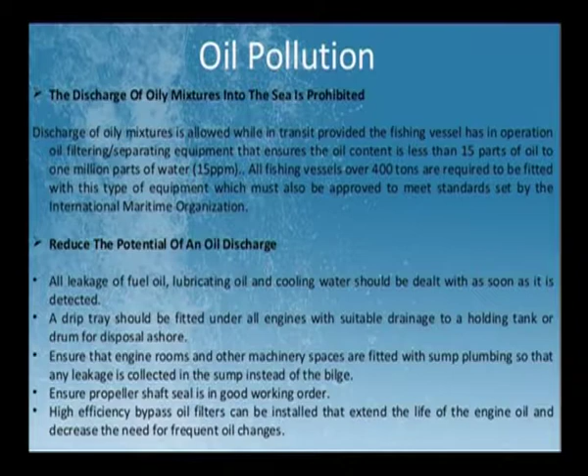We need to also reduce the potential of any kind of oil discharge. So, any leakage of fuel oil, lubricating oil, cooling water should be dealt with as soon as it is detected. And in case any kind of leakage is there, there should be some kind of an alarm system that sounds, so we are aware of any such leakage that is occurring. A drip tray should be fitted under all engines with a suitable drainage mechanism to a holding tank or a drum which can be disposed of later when the ship is ashore.

Ensure the engine rooms and other machinery spaces are fitted with sump plumbing so that any leakage is collected in the sump instead of entering the water body. Ensure the propeller shaft seal is in good working order. High efficiency bypass oil filters can be installed that extend the life of the engine oil as well as decrease the frequent oil changes.

Moving on to garbage pollution, obviously when ships are in commute through many months, especially fishing trawlers, there is going to be certain kind of garbage that is getting disposed, but it cannot be disposed mid-sea wherever they want. There has to be a suitable procedure; it has to be collected in a hold and then released. So, the main items which usually cause problems and are completely prohibited are trawl and fishing nets. They tend to suffocate the aquatic animals, and catch onto the fins of these huge fish or sometimes even small fish, literally killing them.

Synthetic rope, plastic sheeting, 6-pack holders which are basically made of aluminum or plastic to hold drinks, fiberglass, strapping bands, plastic ice bags, bait gaskets, paints, electrical or electronic equipment, disposable eating utensils. That is another huge hazard, especially styrofoam, plastic, all of that is very dangerous to aquatic life. And floats which are used in rescue missions.

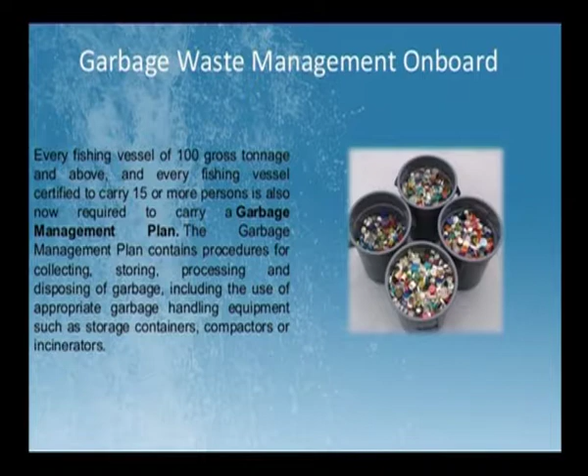So, all of this is encompassed in the garbage plan, and without having a suitable plan and action, they cannot set sail. This includes appropriate garbage, organic garbage, as well as handling certain equipment such as storage containers, compactors or incinerators.

Moving on to industries, we need to improve sewage disposal facilities and disposal systems, marine monitoring and regulations. We need to treat waste, the oils and other chemical discharge before discharging into the sea, effective solid waste disposal and treatment. We need to refrain from construction of illegal seaside ports or harbors.

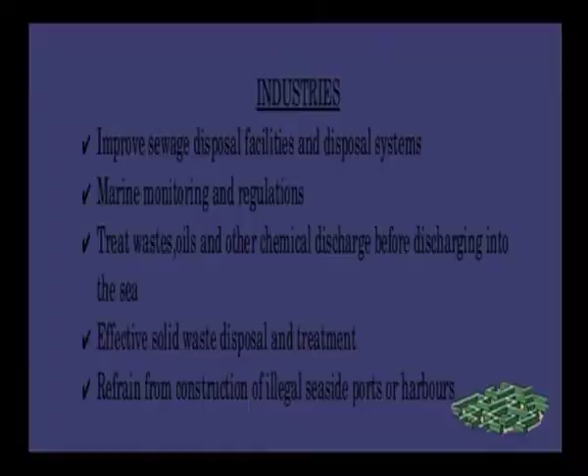What can the government do in this kind of context? The first thing is obviously creating awareness, and we need to provide education to the general public as well as the industries and the workers in these industries. Port management authorities can examine ships and portside factories for any kind of harmful effluents or emissions.

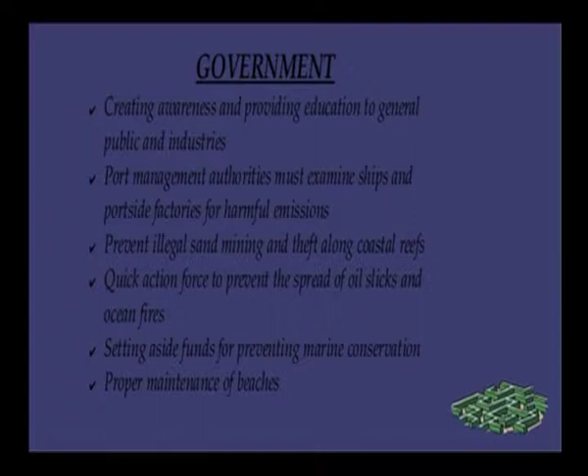We need to prevent illegal sand mining and theft along the coastal reefs. What happens when the sand keeps getting smuggled is the shore gets eroded, and it affects the marine environment, marine life as well as the stability of the coast. A quick action force to prevent the spread of oil slicks and ocean fires, setting aside funds for marine conservation, proper maintenance of all beaches.

Now, simultaneously, when the government is doing the legislative portion of it, what is the role of the scientific community? They need to go about the cultivation of marine bacterial plants that enhance degradation of organic pollutants, protection and enhancement of coral reefs, neutralization of acidic or basic emissions to maintain the pH of the water, because if the pH of the water goes off balance, it is going to affect marine life encompassing plants as well as animals.

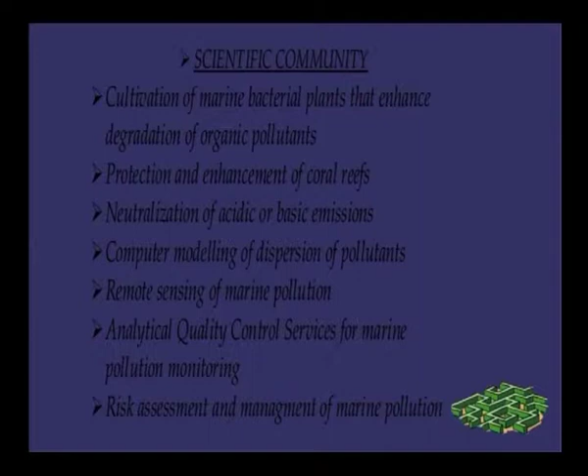Computer modeling of dispersion of pollutants, remote sensing of marine pollution, analytical quality control services for marine pollution monitoring. We need to have a risk assessment and management of marine pollution. So, we need to be aware of the possible ways the water body is getting polluted, how it can be curbed, and the second we realize that it is getting polluted, we should nip it in the bud rather than let it bloom and grow.

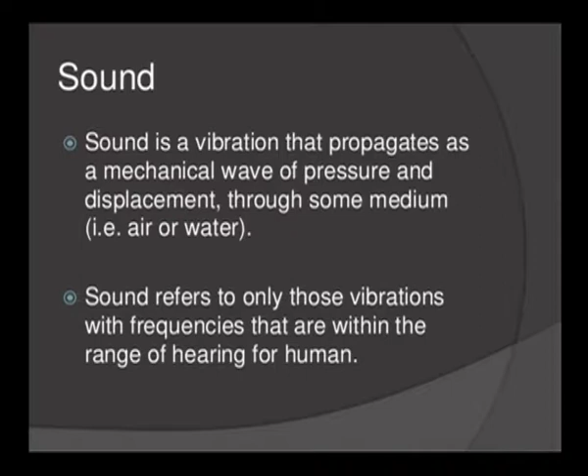Now, moving on to noise pollution, cause and effect. Noise pollution is a derivative of basic sound. Sound is nothing but a vibration that propagates as a mechanical wave of pressure and displacement through some sort of medium, usually air or water. Sound refers to only those vibrations with frequencies that are within the range of hearing for humans.

Now, the difference between sound and noise. Noise is basically any kind of unwanted sound. It is measured in decibel units. So, anything pleasing and within the range of human hearing is considered sound, and anything beyond this range causing some kind of discomfort to humans is referred to as noise.

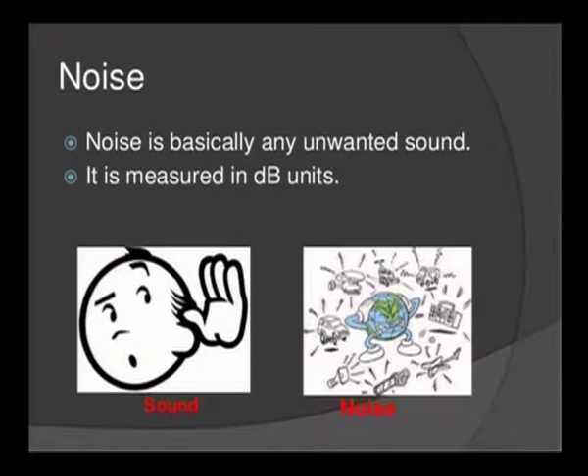Characteristics of noise: sound pressure, frequency, duration, time of the day, location, intermittency. All of these factors decide when it is noise. Now, when someone is driving in the middle of the road and someone honks, that can be considered noise, but it is quintessential noise. You cannot get away from the honking of a horn.

At the same time, at 4 a.m. when they are deep asleep, if the same horn is blared around their ears, that is also noise, but that is not required and it is unnecessary. So, that is what decides the characteristics of noise. All of these elements decide what kind of noise it is, when, where and how frequently these noises occur.

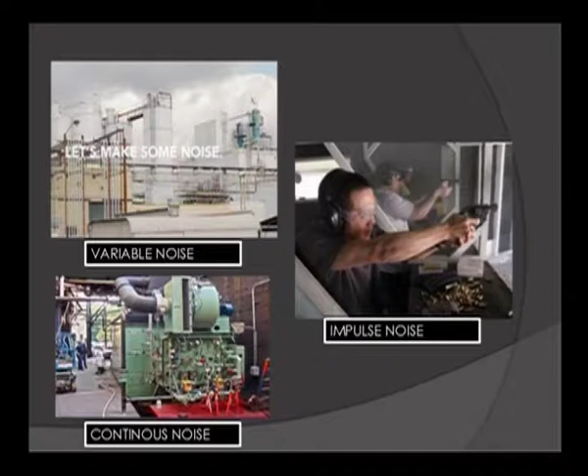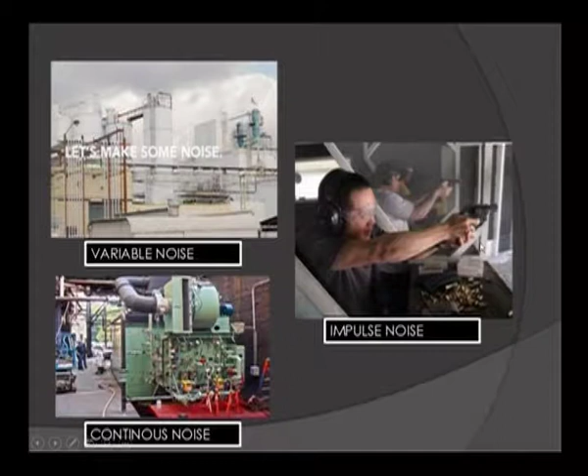If you see, this is variable noise. You have the simple example of a factory sometimes. Continuous noise, similarly in a factory, when you have particular machinery chugging out, say it runs for 10 hours, 12 hours, and the workers are made to wear earmuffs to prevent their hearing from getting destroyed. And impulse noise is like the shot of a gun. It needn't be continuous, but when it occurs, it's quite strong and it is piercing.

Instrumental noise, you have thermal noise, flicker noise, shot noise and environmental noise. Moving on to noise pollution. Noise pollution refers to a type of energy pollution in which distracting, irritating or damaging sounds are freely audible. In this type of pollution, contaminants are not physical particles, but waves which interfere with naturally occurring waves of a similar type in the same environment.

Noise pollution is considered very subjective, because for some people some kind of music itself could be noise, versus some people will enjoy it as music. So, noise pollution as such has two different degrees. One is the kind where it is completely subjective and one where there is recorded evidence of it causing a lot of harm. Sources of noise pollution: household sources.

Usually household sources are the subjective noises, like a grinder running, a mixer running, television blaring, someone is not able to hear, the volume is at a much higher level. All of these are manageable sources of pollution. Social events, again it occurs not continuously but now and then. Commercial and industrial activities, this is where we need to be careful. It could have a threshold which may cross and cause irreversible damage.

Transportation, again like I just mentioned, it could be avoided, but it is quintessential at the same time. So, the time and the areas where transportation noise can be regulated, like hospitals and schools, it can be curbed. So, in areas like that it can be reduced, but cannot be avoided completely. So, if you look at household sources, the typical ones that you see are food mixers, grinders, washing machines, dryers, air conditioners, televisions, loudspeakers and even pet animals. So, these are usual sources within households.

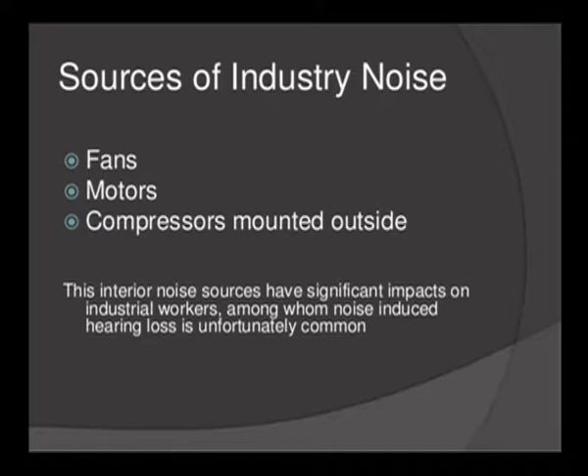Sources of industry noise, you have fans, motors, compressors which are mounted outside. These interior noise sources have significant impacts on the workers, among whom noise induced hearing loss is unfortunately considered common and an occupational hazard. Not all of them are comfortable wearing earmuffs, and sometimes earmuffs do not help at all decibels of noise. In transportation, we have road traffic noise, aircraft noise and noise from railroads, the typical transportations that we use.

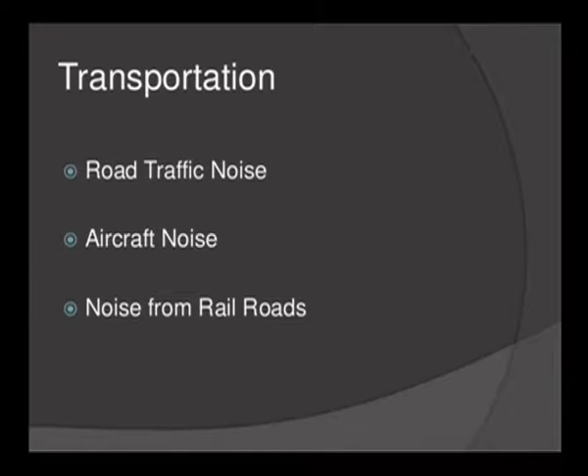Causes of noise pollution are typically poor urban planning, sounds from motor vehicles, sounds from amplified musical instruments, car alarms, office equipment, factory machinery, construction work, barking animals, appliances, audio instruments, loudspeakers and noise created by people themselves. Effects of noise pollution: obviously, we need to again consider the environment. So, effects on environment, which includes vegetation and property, on animals and humans as well.

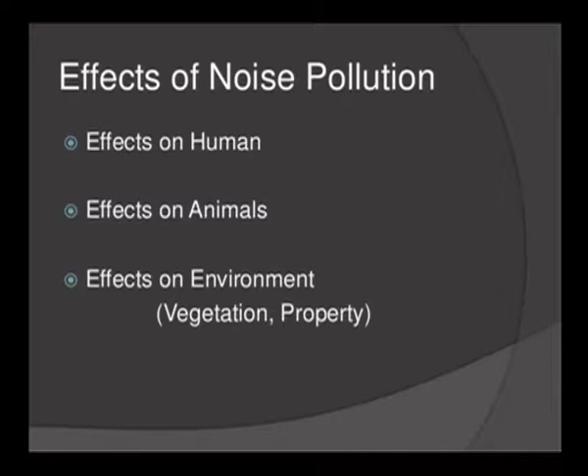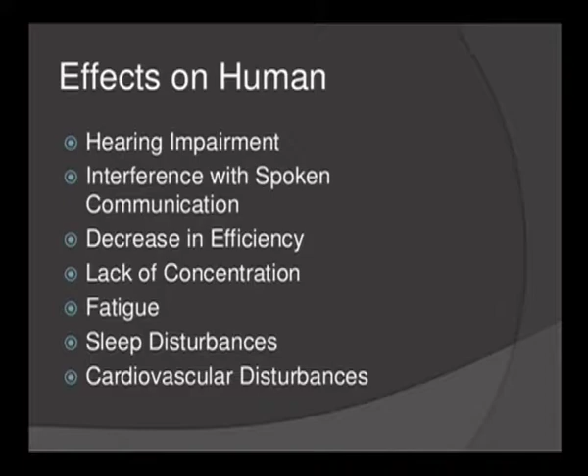Effects on humans, if you look at it, hearing impairment, interference with spoken communication, decrease in efficiency of work because we are distracted, lack of concentration, fatigue, sleep disturbances, cardiovascular disturbances. Disturbance in mental health, impaired task performance, negative social behavior and annoyance reactions, abortion of fetuses, abnormal fetuses, temporary or permanent deafness.

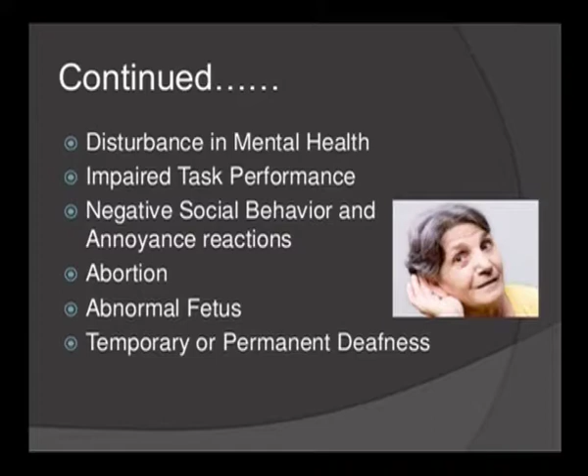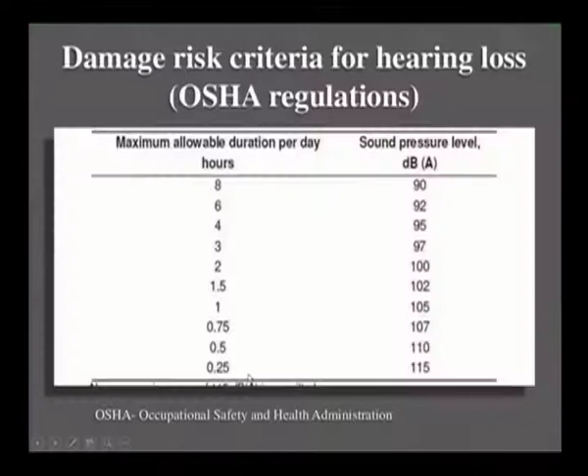by constant noise. And if you work at a level where 115 decibels is created, you can only work for 0.25 hours in a day. So, you need to take this strictly into consideration to avoid permanent damage to our hearing organs.

Now, Indian standards for ambient noise levels: in a silent zone, daytime is about 50 and night is 40 decibels. Silent zone is usually up to 100 meters around hospitals, schools and courts. These zones are declared by competent authorities. Use of vehicle horns, loudspeakers and bursting of crackers is completely banned in these zones, irrespective of whether it is festival time or any particular time. It's banned throughout the year, throughout the day and night.

Now, if you move on to industrial area, daytime they allow about 75 decibels and night 70. Commercial area, daytime is 65 decibels and night time is 55, and residential area, daytime is 55 decibels permitted and night time is 45.

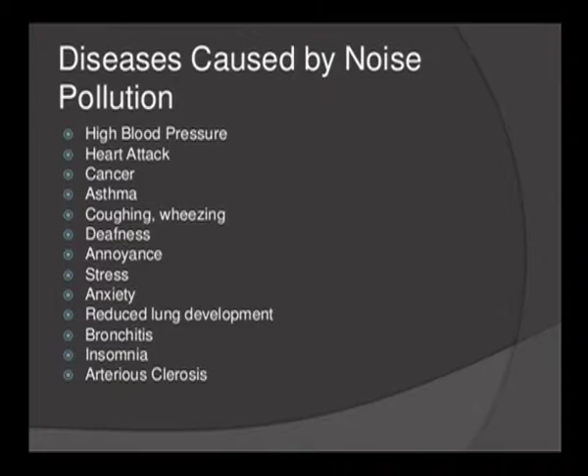Now, typical diseases which are caused by noise pollution: high blood pressure, heart attack, cancer, asthma, coughing and wheezing, deafness, annoyance, stress, anxiety, reduced lung development, bronchitis, insomnia and arteriosclerosis. These are the typical organs that get hit. Your brain, the lungs and the heart take the major hit. You have high blood pressure, arteriosclerosis, heart attacks, cancer, asthma, stroke, reduced lung development. All of these are the typical effects.

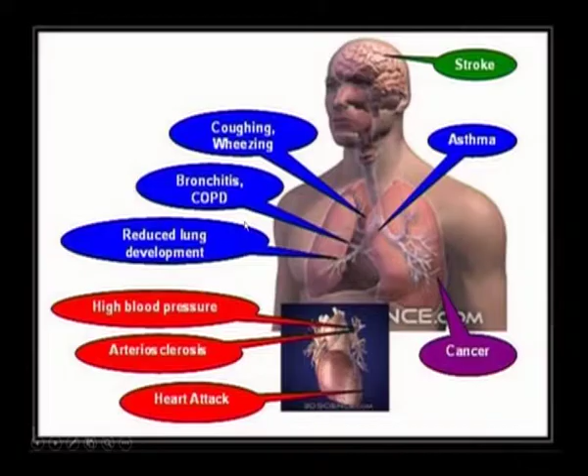Now, moving on to effects on animals. It basically damages their nervous system. It alters prey and predator detection, because their hearing senses warn them that a predator is on the prowl. If their hearing senses are tremendously affected, then they can be captured and eaten easily. It creates problems in navigation. They become dangerous and start attacking because they are on the defense.

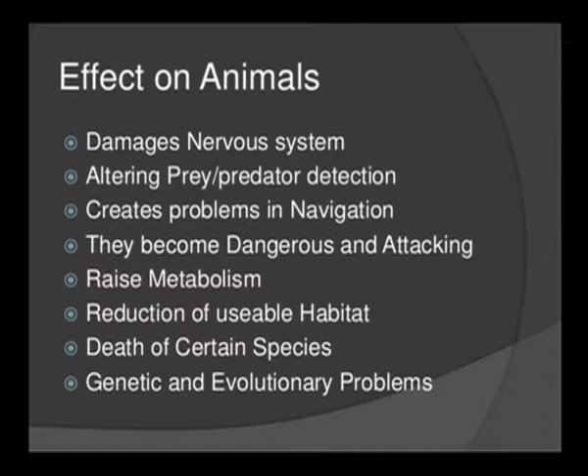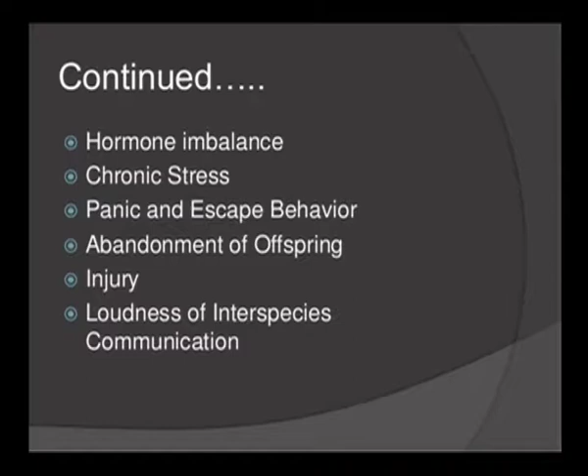It raises their metabolism, reduction of usable habitat, death of certain species, and that again causes a lot of imbalance to the food chain, genetic and evolutionary problems. It causes hormone imbalance, chronic stress, panic and escape behavior, abandonment of offspring, injury, loudness of interspecies communication. Because once they become deaf, they will start talking louder amongst each other and that will create noise again. So, all of this is the repercussion of noise pollution on animals.

Moving on to the effect on environment: breakage of earth barrier, poor quality of crops, damages buildings, bridges and monuments, weakens the edifice of the building.

How do we go about controlling noise pollution? First is control it at the source, then you have an option of controlling it in the transmission path, and finally when you know that the noise is going to be there, you have to use proper protective equipment. This particularly applies to people who are working in such environments, like traffic workers as well as factory workers.

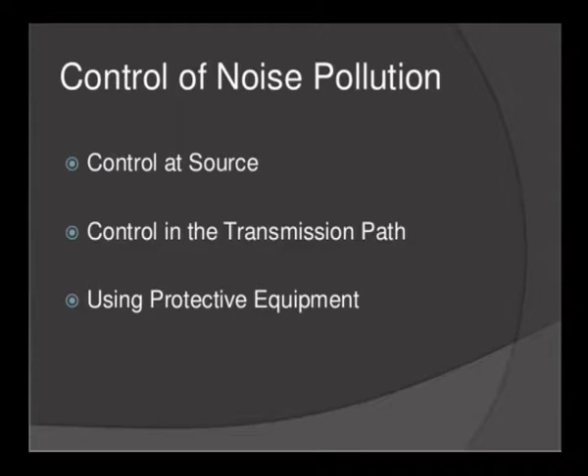Controlling at its source, we need to reduce the noise levels from domestic sectors, maintenance of automobiles, use of economic instruments, control over vibrations, low speaking voice, prohibition on usage of loudspeakers, selection of machinery, maintenance of machines.

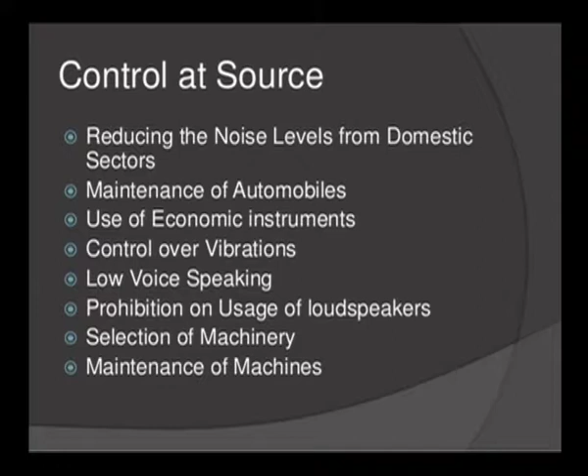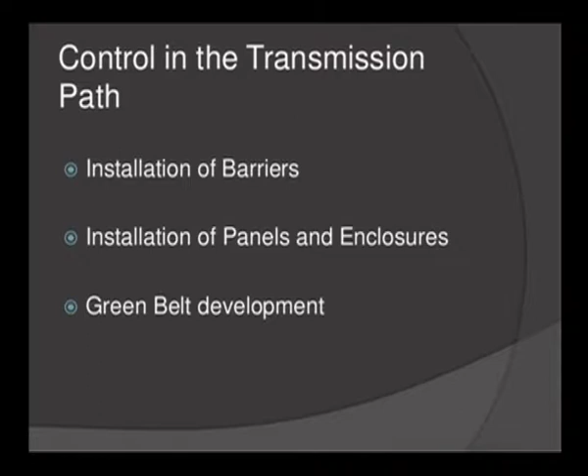Control in the transmission path: installation of barriers, installation of panels and enclosures, green belt development. Naturally, plants are the best absorbers of sound, and if you have a number of houses on the main road, having tall trees helps reduce not only noise pollution but also air pollution as well.

Using protective equipment, job rotation. Like we just saw, the number of hours that are permitted has to be strictly adhered to. You cannot just exceed the number of hours. So, you need to ensure there is a shift system and that it is strictly followed. Exposure reduction, hearing protection and protection at the receiver's end.

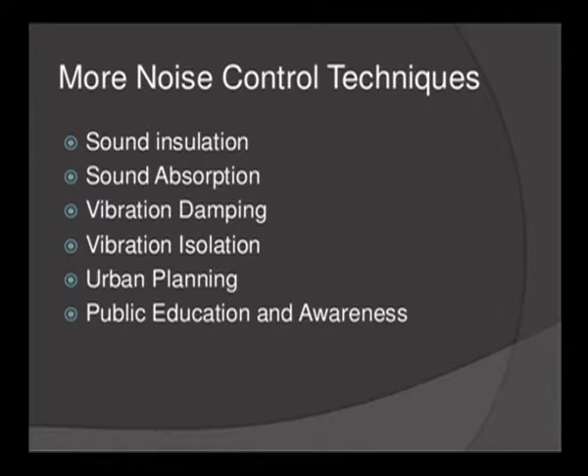Similar noise controlling techniques are sound insulation, sound absorption, vibration damping, vibration isolation, urban planning. So, zones can be made such that there is a silent zone, industrial zone and residential zone. All of these are segregated properly so that any overlap that occurs does not cause any health issues. Public education and awareness.

Moving on, how you go about controlling noise pollution at the receiver's end. For people working in noisy areas, ear protection aids like plugs, muffs, noise helmets, headphones should be provided as it's an occupational exposure. At the source, this is only possible if the working method is improved.

We have to design new machines to replace noisy ones. Machinery should not be just left without any maintenance. They have to be constantly oiled, maintained, repaired and serviced to ensure they are working at the optimum level. Proper lubrication and better maintenance of machines. Insulating noisy machines with sound absorbing materials. Using silencers to control noise from automobiles, etc.

How can zoning help? Increase distance between source and receiver by zoning of noisy industrial areas like bus stands and railway stations away from the silent zones near residential areas, educational institutions and hospitals.

Sound insulation. Sound insulation can be done by constructing windows with more than one pane of glass and filling the gap with sound absorbing material. Acoustic tiles and perforated plywood can be fixed on the walls, ceilings and floors to reduce noise.

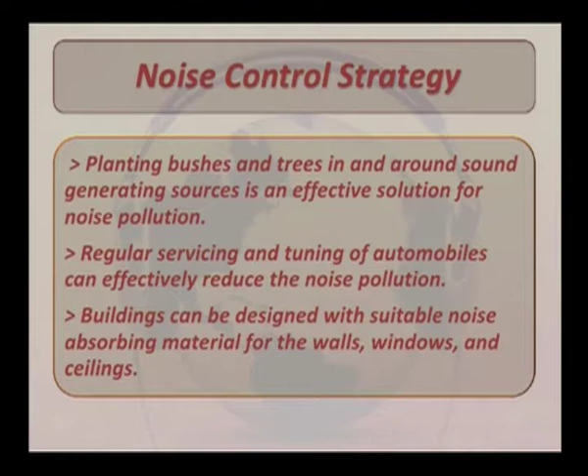What is the strategy for controlling noise? Planting bushes and trees in and around sound generating sources is an effective solution. Regularly servicing and tuning automobiles. Buildings can be designed with suitable noise absorbing material for walls, windows and ceilings. Workers should be provided with equipment such as earplugs and muffs for hearing protection.

Similar to automobiles, lubrication of machinery and servicing should be done to minimize noise generation. Soundproof doors and windows can be installed to block unwanted noise from the outside. Regulations should be imposed to restrict the use of loudspeakers in crowded areas and public spaces. Factories and industries should be located far away from residential areas.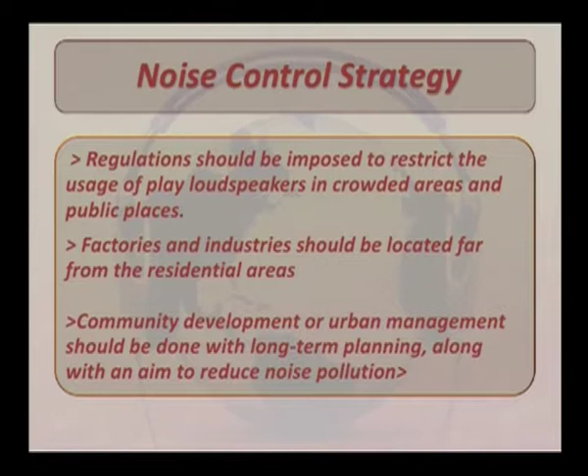Community development and urban management should be done with long-term planning with an aim to reduce noise pollution, and if we know that it's going to be there, how do we go about reducing the exposure at the receiving end? Social awareness programs should be taken up to educate the public about the causes and effects of noise pollution. Besides planting of trees, there have to be strict legislative measures enforced to control the nuisance of noise pollution.

The main problem with noise pollution is it's not given the same importance as air or other kinds of environmental pollution. Only now has it reached a level where we recognize it; we don't have adequate awareness with respect to noise pollution. So besides having controlling measures, there have to be awareness programs conducted at schools, educational institutions, and factories where these workers are employed.

They should be made aware that they are working in a noise pollution area and have to take certain precautions, and if not, these are the risks of working in such a place. Most of them are laborers who do not realize the risks of working in such a noisy place. It causes a series of health and environmental issues, which will eventually transcend to other realms within the ecological cycle.

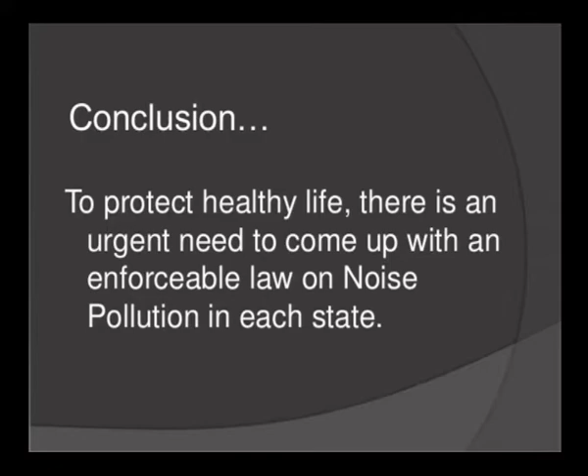In this lecture, we have looked into marine pollution, the main causes being oil pollution and garbage pollution, and noise pollution, its cause and effect, and measures to control it. At the end of this lecture, we should be able to answer the following questions. What are the main concerns with respect to oil pollution? How can garbage pollution in water bodies be reduced? What is noise pollution? Discuss the cause and effect of noise pollution.